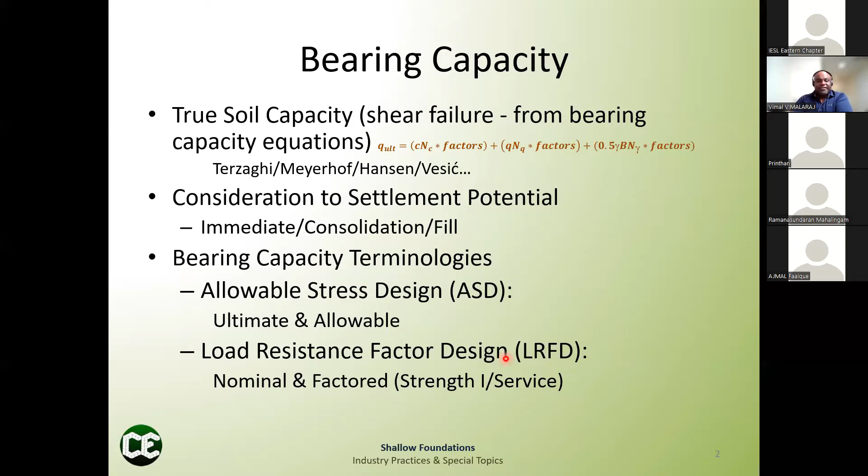So the next one, I want to talk about the true soil capacity. That's totally a 3-term equation. You have a first component, second component, and third component. You have a lot of factors here, except this, the basic component.

So the first one is soil cohesion related. If the soil has a cohesion, say for example if it's a clay soil or something like that, if it has some cohesion, you can consider those values.

And the second component is effective stress at the footing depth. So whatever depth you are placing the footing, that second term is dependent on that. The third term is half the footing width below the bottom of the footing. If you place the footing deep enough, then you can provide a higher bearing capacity, because this term is going to depend on that value.

That's why even if you have a big 30-story structure, if you want to put like a 2-3 level parking garage below, then you are going to put your foundation way deeper than the finished grade. Then you're going to have a pretty large soil bearing capacity, but then you need to consider the settlement.

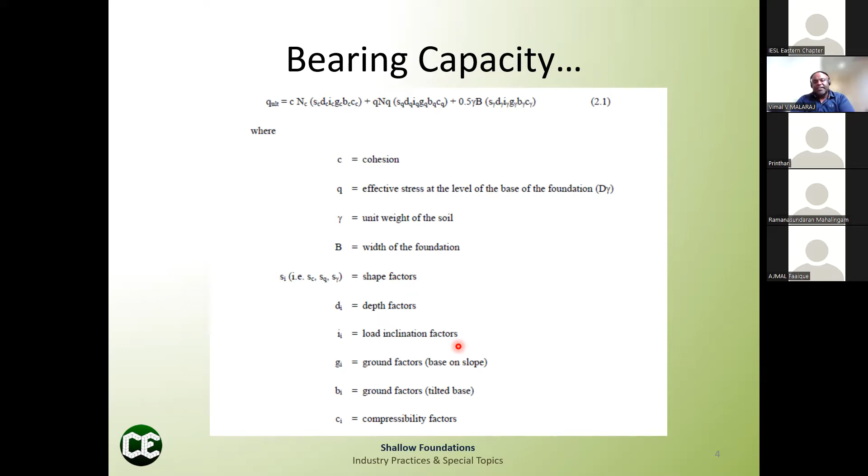So these are the bearing capacity factors: NC, NQ, and N gamma. This is Terzaghi, who first introduced the concept of bearing capacity. He's the father of geotech.

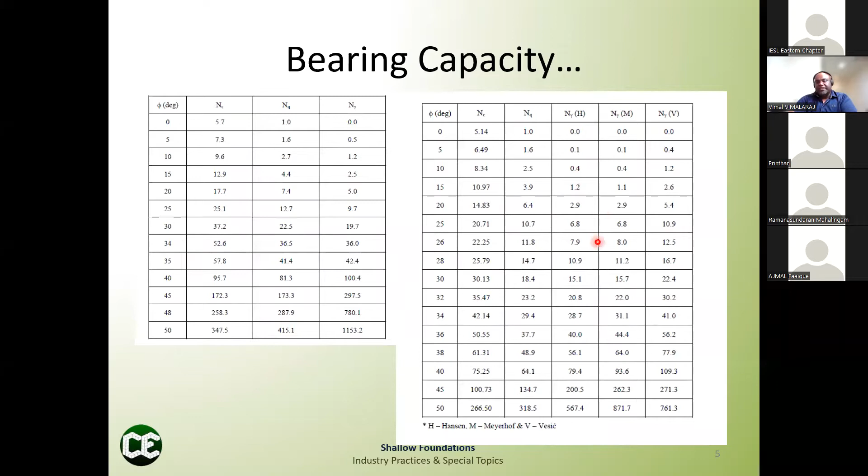Then everybody modified it—Hansen, Meyerhof—basically introduced different factors and calculated these values. Everything is a little different. NC and NQ are the same, but N gamma is different for all these authors.

So bearing capacity failure is a shear failure in the soils, and there are three cases of how the footing can fail. It could be a general shear failure, which is the most common one—you're going to have a failure going fairly deep. That's why you use the half B term: if the footing is B in width, you go half B, because general failure is the most common type of failure.

Then you have local shear failure, and punching shear failure, meaning the footing just sinks into the soil. If the engineer or contractor is bad, you'll have loose or soft soils at the base of the foundation causing this kind of punching failure, but it's very rare because with proper construction control, compaction, and soil preparation, punching failure is very rare.

So local shear failure is in between, but the most common case is general shear failure. If you consider punching shear failure, there are factors you need to apply to calculate the actual ultimate bearing capacity, because if there's a possibility of punching shear failure, you have to reduce your bearing capacity.

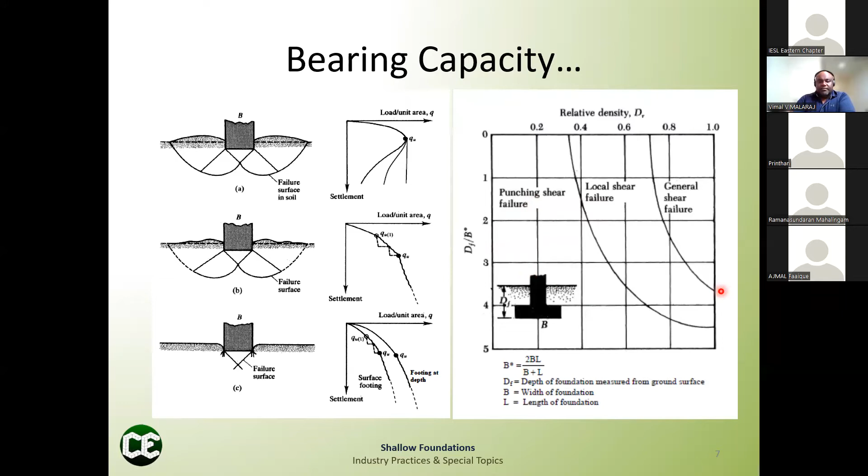So I have a spreadsheet developed for various methods. What I always do is, rather than considering just one method, I consider all these methods, because there'll be a huge variation.

If the groundwater table is shallower, the bearing capacity will go down. So I usually have a spreadsheet to calculate all these methods and get an average, then recommend a value. You also have to consider settlement, then go with the recommendation. This is for a particular footing size—let me go into it further.

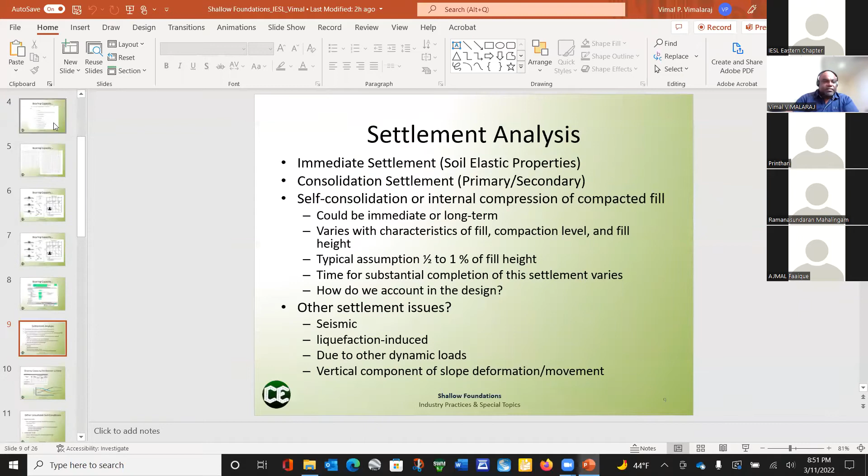Let me show the spreadsheet.

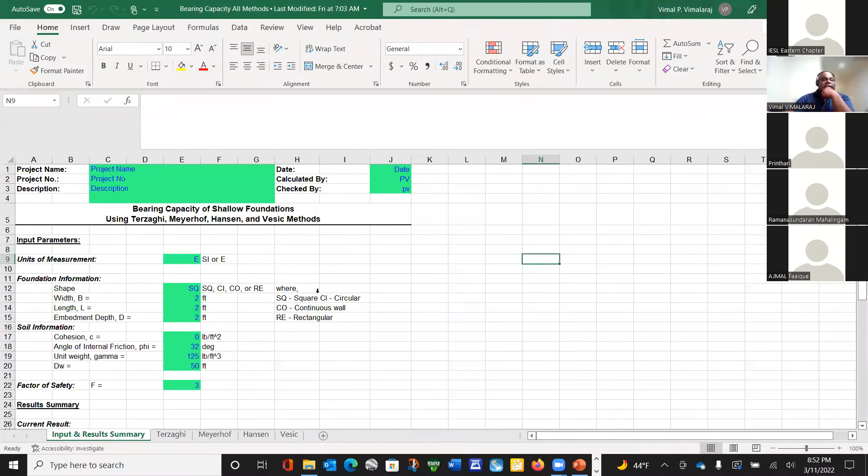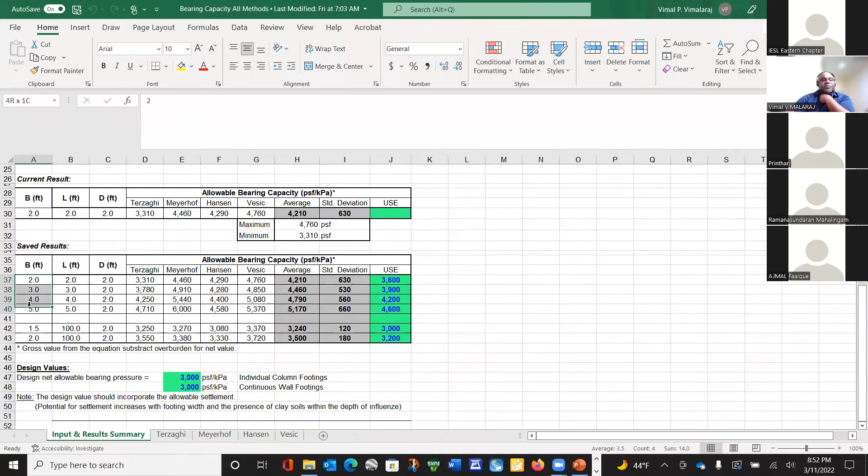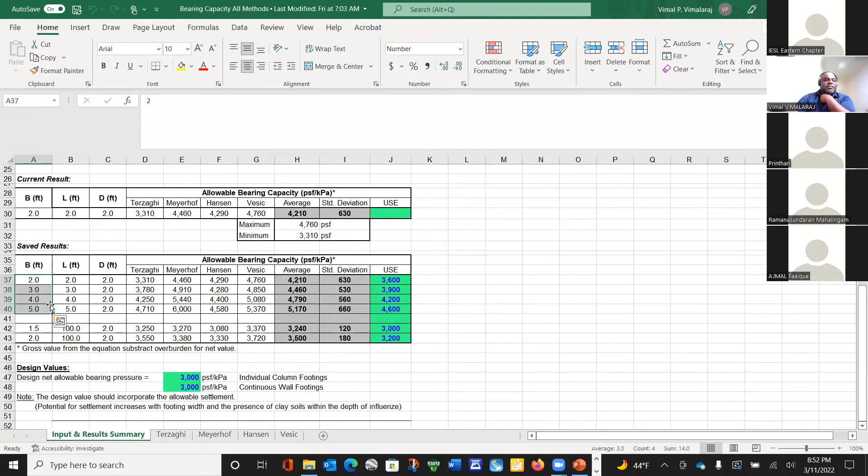So what I do is base it on true shear failure. If you have a building with various foundation sizes, I calculate for different widths. This is continuous—if you have a building on the edge, you might have a continuous wall foundation, and on the corners in some places you'll have column foundations. Then you calculate for different foundation widths and sizes, and recommend a net allowable bearing pressure.

But there's an important note: you need to consider settlement, because that might be the controlling factor in most cases. So you check it here, and when you calculate your settlement, you can recommend a particular value. Then this will be used by the structural engineer to design the foundation.

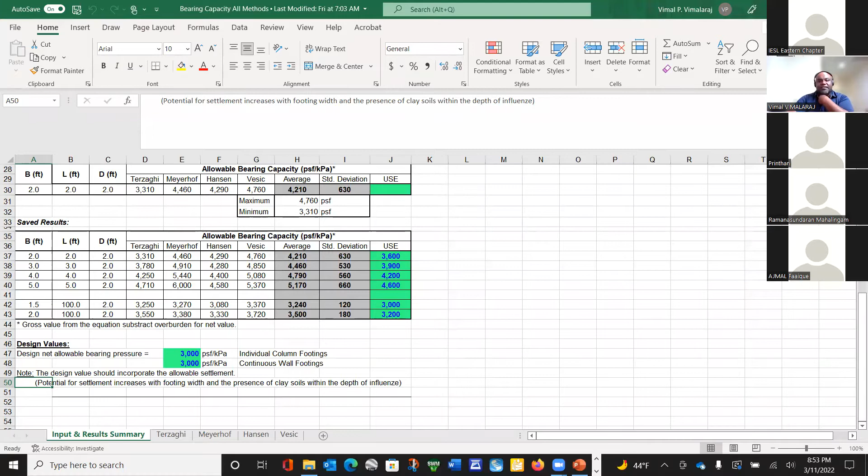And let's go to the... okay.

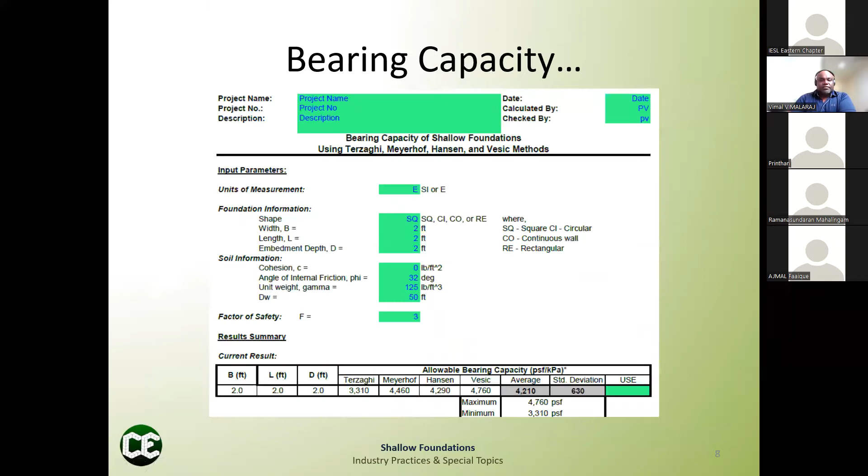When you go to settlement, when you apply the foundation load, you're going to have settlement. Depending on soil conditions, there could be immediate settlement. If you have clays with a shallow water table, you could have consolidation settlement—it could be primary, even secondary, even creep over a long time. It could happen. There's also one called self-consolidation or internal compression.

We usually don't learn much about this in university, but it's very important, because whenever you have a large site with a lot of cuts and fills—not all sites are flat. Some places are flat, but if you go onto a hillside, and you're going to place a 1,000 feet by 300 feet building, that's 300,000 square feet—that's a large building.

If you want to place it on flat ground, that's fine, but if the ground is sloping, there will be a lot of cuts and fills. So you'll cut one side, like 10-15 meters, and fill the other side 15 meters. That filling means you're placing compacted fill.

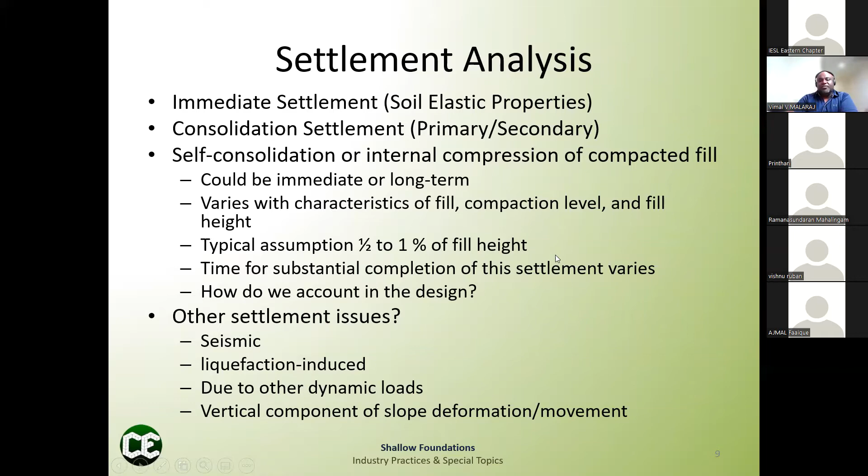And if you place the building right next to a slope, could there be any slope instability that adds settlement to the foundation? So those are things you need to look at overall. But if it's a large project with slopes and everything, everything needs to be carefully looked at before you prepare the geotech report.

So, bearing capacity settlement criteria - typically on a small project, I'll just give a particular value, like use 2000 PSF. If you take the IBC, International Building Code, they have minimum recommended values - usually for any soil you can use 1500 PSF. Even for bad soils, even the structural engineer without a geotech report could assume 1500 PSF.

And they have some kind of values you can use without a geotech report, but in our report, we will recommend whatever we calculate. So we don't have to depend on the building code or anything.

That's why on all these projects they need a geotech report, so they can economically size the foundation and address any soil issues. There are sites with soil problems, so they want to find out those things. That's why here in this area in the US, a geotech report is important.

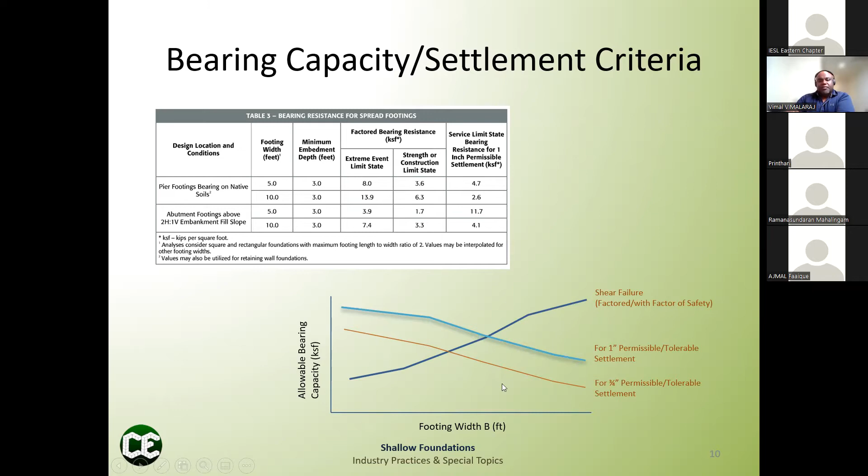There's a certain point where it might make sense to design the foundation, but you need to pick, say if your footing width is 1 meter, the structural engineer will go and pick this value - whichever is lowest, because you need to consider everything. If it's a 1 inch settlement, that's what you want to consider, so he considers this curve and this curve. If it's 1 meter, he goes there, and that's the value he has to use. If it doesn't work for the load, he'll pick another load, somewhere here. On large projects like bridges and very large buildings with significant structural loads, you'll develop a curve like this for a site, making it easier for the structural engineer to pick values depending on footing sizes.

So those are the typical bearing capacity theories, but there are some other unsuitable soil conditions. Here there's expansive soils, if it's clays.

If the clays are very dry in their native state, they can absorb water and expand. That's bad, because you calculate your settlement, but the expansion is a problem too. If the footing lifts up, then you're going to have problems with your house or building. So that's very important - we have to investigate expansive soils, if there's clay, and figure out how to address it.

The common procedure is you remove like 0.6 to 1 meter and replace it with good soils. Then you're not placing your foundation on the expansive clays, because whenever the clays are buried deeper, there's much less chance for water to get into them and cause expansion - at least that's the theory. You could also do some alternate designs.

For houses, they will design a post-tension slab foundation that can tolerate some expansive movement in the clays. For large buildings, it's hard to do a post-tension slab because of the spans and everything. But there, they can do drilled piers with a bell bottom - you put a drill shaft, and if you have a bell bottom, meaning it goes down a little wider this way, then it's hard to pull it out. There are some places here in this area, whenever I do geotech reports for some projects, I had to be really careful because I know there are very, very bad expansive clays, and I had to investigate everything and do the right testing to provide the correct recommendation.

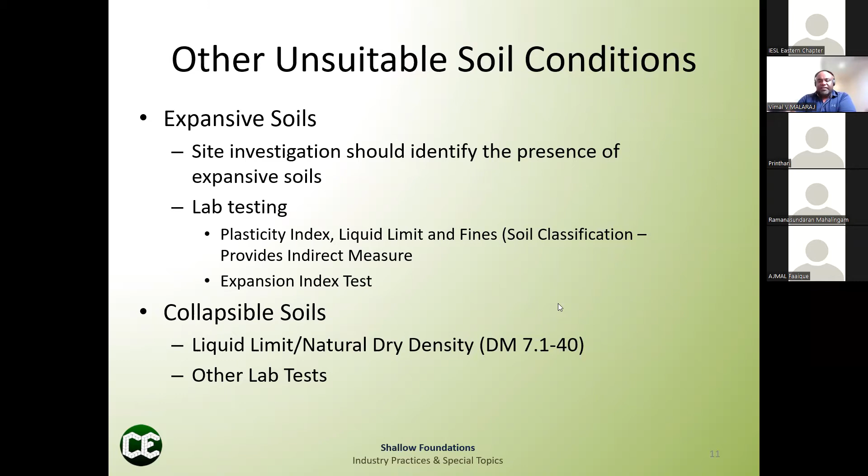In Sri Lanka there may be, but in some regions here also there are collapsible soils, because they are very strong when dry, but whenever they get some moisture, they can just collapse and cause a lot of settlement. There are certain criteria you can use to identify collapsible soils, for example here.

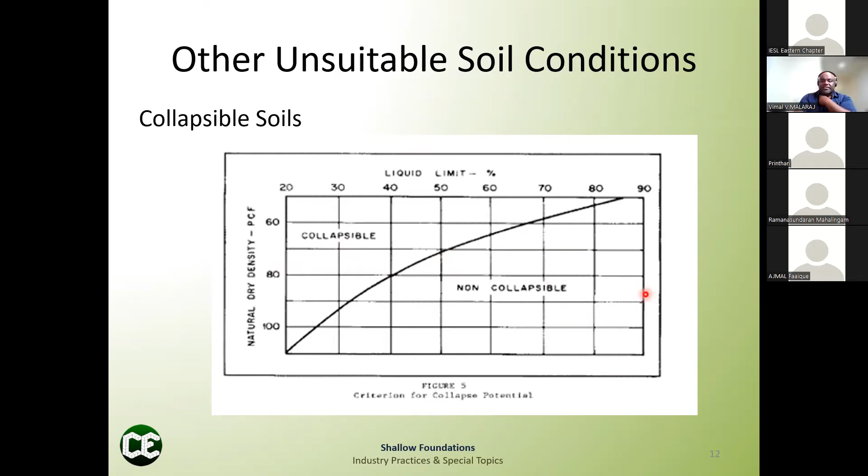Whenever you want to recommend bearing capacity, everything in the geotech report, you need soil information. You cannot just assume, okay, this is the site at this address, so let's use a 30-degree angle and give all the bearing capacity and everything. Then you will end up in the middle of a lawsuit. It's usually like that here, so you have to be careful. You need the soil information.

How much soil information do you need? If it's a small house, you will dig down like 5 to 10 feet. That's enough, because usually we try to go 2 times the width of the footing. So if it's 3 feet, 6 feet should be enough. If you know the soil information to 6 feet, you can provide the recommendations, all the bearing capacity and everything. But if it's a bridge foundation, you're going to have larger loads and bigger footings.

Then you may have to drill borings to 100 feet. If it's a bridge and everything, there are government AASHTO guidelines you need to follow, typically 100-foot borings and everything. Also, even a small building, if it's in a problem area, let's say liquefiable soils because of earthquakes, then you need to do the right exploration, borings or test pits, and the right field testing to get your soil information.

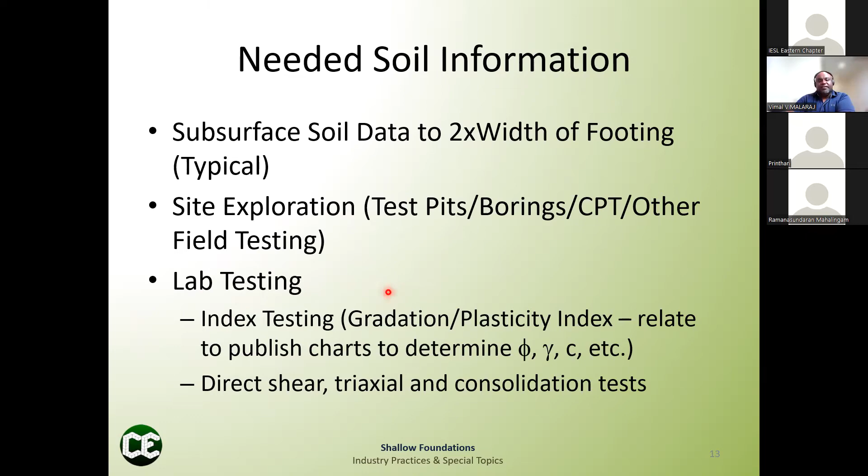If it's a large enough project, yeah, we can include a direct shear and everything. But if the project is small enough, you have the budget also small enough. You don't have an unlimited budget on the geotech, you have a particular budget. You give the proposal, and within that proposal, because it's competitive, like if I give for a small house, and if I want to do the geotech report, and if I say $10,000, then somebody else is going to get the project. So that's why you need to know the soil condition, then you can include the right amount of testing, and you can limit the budget and get the project.

So this is test pits, and it's one of my projects. We use the backhoe or excavator, depending on if it's hard soils, and if I want to dig down like 20 feet, 25 feet, I will use a large excavator.

This is a trench. I don't want to get into some earthquake faults, because this project had some earthquake faults. There are regulations, you cannot put the building on the fault. So you need to identify the faults, that's not my expertise. I had another geologist, he did the earthquake fault trenches, so they can identify the faults if there are some. Then once they investigate, I will also log the soils and what kind of soils and everything, collect samples, and prepare the logs.

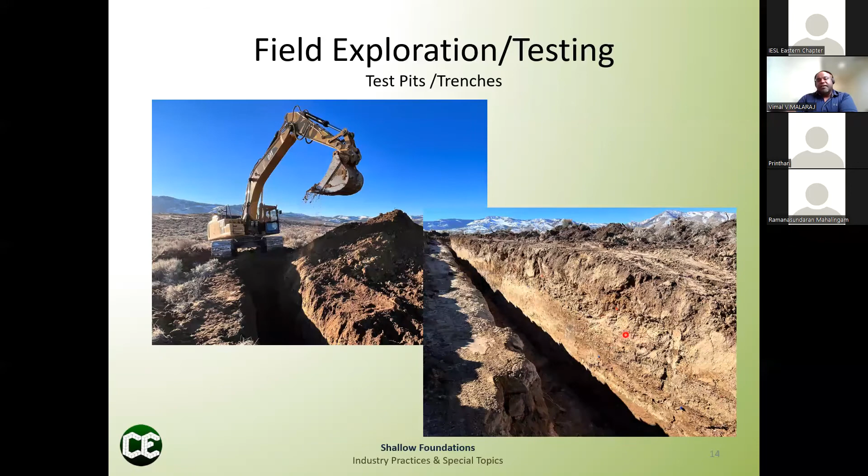Okay, so this is borings. We don't do cone penetrometer testing, it's pretty hard in this area, the soil has a lot of gravels. Typically if you have clays and everything, CPT is you push a cone, then depending on your result, you can figure out what kind of soils and what kind of properties it has. But here it's hard to push those, because we have a lot of gravels and cobbles, and it's hard to do everywhere. So we typically do the borings.

It could be just a standard hollow stem auger boring with the SPT testing, standard penetration testing. SPT testing is a measure, you drive the sampler 6 inches, 6 inches, 6 inches, 0.15 meter intervals, then for the last 0.3 meters, whatever the block counts, that's called the SPT blow count, field blow count. Then you can adjust it and convert it. There are charts in the geotech literature, you use those block counts, average block counts, then you can calculate the friction angle and do the settlement calculations based on those block counts. It's very helpful, the SPT block count.

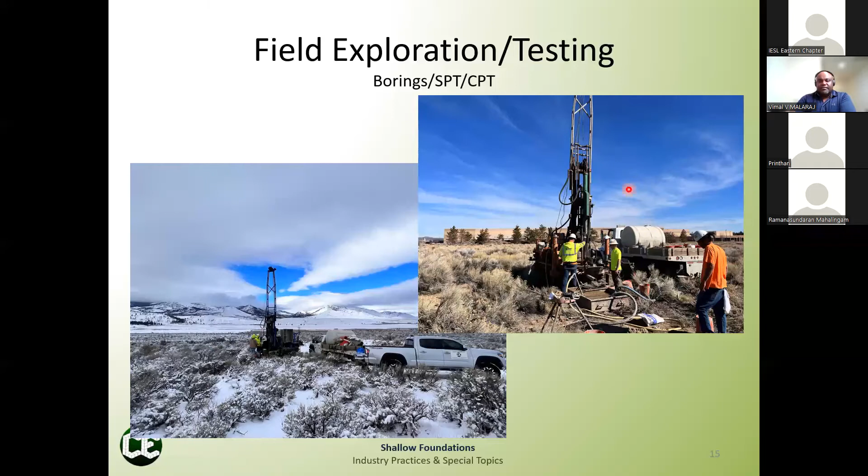And other testing means, let's see. Okay, so this is like a standard boring log, you do the SPT blows in the last 12 inches, that's your SPT field blow count, it will tell you the soil. This was one of my projects, so you log them, this sample will come out as silty sand with gravel. Then we can log the fines and sand, gravel, how much percentage and everything. Then I'll do lab testing right here, the lab test results will exactly tell me what is your liquid limit and plastic limit. Then I can confirm my field logs, and prepare this boring log or test pit log.

Then you have all the information throughout the site, and you use that information to develop recommendations. It's not only the main recommendation for your foundation for a building, there are so many other recommendations you have to do.

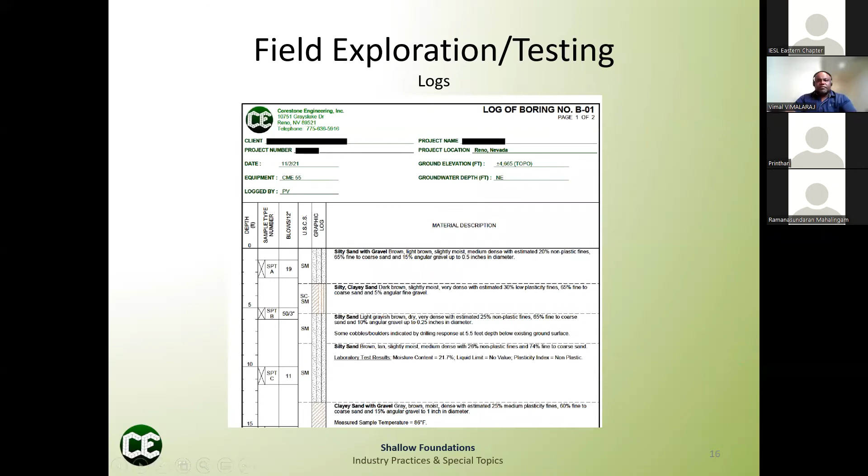So another testing is geophysical testing, you can measure the shear velocity with the geophysical testing. You have this geophone sensors and a data unit, so it will collect your data, and you can model the shear velocity. This is useful whenever you do the seismic classification and stuff.

And then you can do the geophysical testing to find out your P wave velocity, because if there's a bedrock site, they want to know whether they can excavate the bedrock. If it is soft enough, you can use the dozer and rippers and everything, they can excavate it. Otherwise if it is very hard, you need blasting. So if I need that information, I'll do bedrock coring, and do this kind of geophysical testing, then you can correlate to charts and everything, and figure out whether you need blasting or you can excavate.

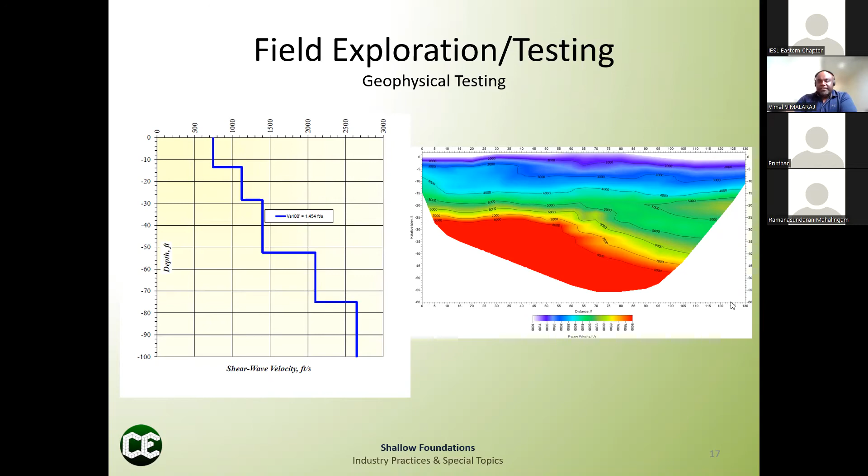Okay, so I just want to cover the geotechnical investigation report.

I'm not sure how frequent in Sri Lanka they do geotech reports for projects, but here, for single family houses, like small houses, you don't need it, except some regions, some cities and counties might require it to build a house. But if it's a commercial project, even a small coffee shop, typically you need a geotech report. Different cities and states have regulations requiring a geotech report for these kinds of projects.

But even if you want to build a house, the city will tell you that you don't need a geotech report, but when you build the foundation, somebody needs to certify the soils. So they'll call us, and we'll have to go take a look at it, and whatever design they use, the bearing capacity - are the soils good enough? Do you have expansive soils? Those are things we evaluate at that time during construction for small projects.

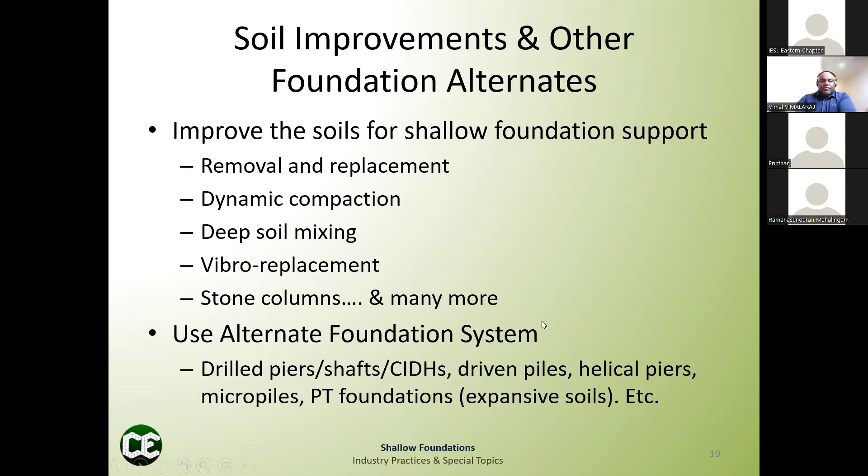Okay, I want to touch on this. This is something special, a special topic. I already went through shallow foundations and what we can do if they don't work, improve the soils or do deep foundations. So I want to touch base on a special topic, especially dynamic foundation analysis, because I come across it a lot, since we do a lot of geothermal power plant projects.

Geothermal power plants mean you have production wells, because you get geothermal energy from the ground. They drill like 1,000 feet or something to get a bigger heated source of water, then use that water to produce electricity. Then they inject it back in the injection drill hole. So the energy comes from that heated steam or water, and they use that energy to produce electricity.

Once you get your energy from the ground as steam, you pass it through the turbine generator. The turbine works and the generator produces electricity. You may have two turbines with the generator in the middle, but these are huge pieces of equipment, they are rotating equipment.

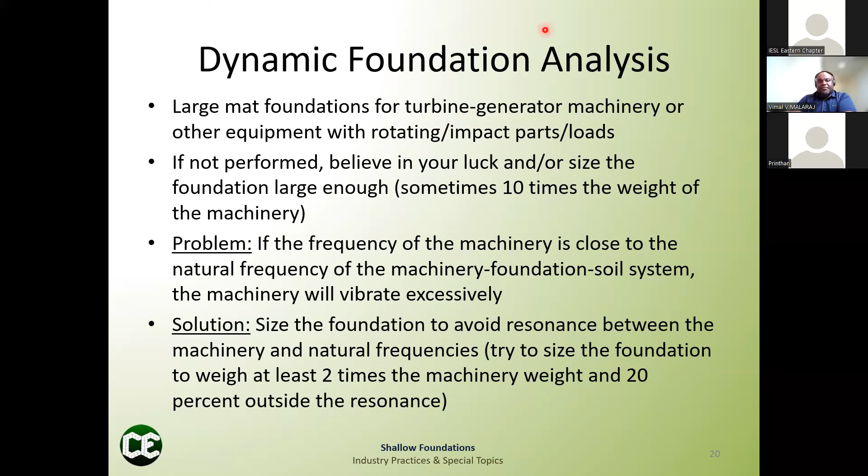So you have to look at it as a machinery frequency. If you have an RPM, you can calculate your machinery frequency - that's very straightforward. Then the natural frequency of the system, as I told you, is the equipment, foundation, soil together.

So it will change - you have vertical mode, horizontal, rotation, torsional. So you're going to have various natural frequencies, different for each vertical mode, one natural frequency. So everything shouldn't match, all these cases shouldn't match.

Whatever you calculate, it shouldn't match - you should be 20% away. So that's pretty tough, you need to make sure everything works.

So how do you calculate your natural frequency? If you have the stiffness, you can calculate your natural frequency, because you have K over M, and M is the total mass - mass of the foundation plus the machinery system.

That's the one sitting on the soils. And then your K is the stiffness value, which depends on your soil properties, spring stiffness value. So soil properties, typically you need the shear modulus, Poisson ratio, weight, and everything.

Since it's so complicated, we try to do it in two methods. There are two methods - it's called the lumped parameter method and the elastic half space method.

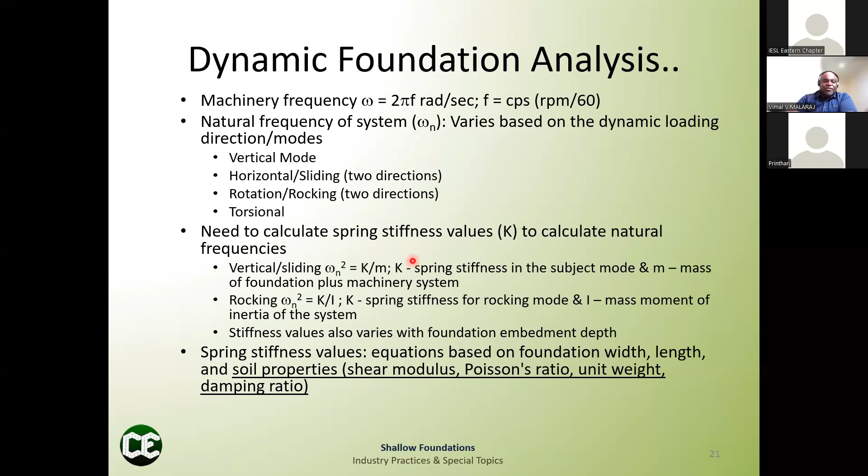Just to make sure, because it's a complicated analysis, you want to make sure it works. So you do it in two ways, and then you can make sure the foundation size is right, because you have a particular size.

You need a particular size, say 15 by 40 feet - that's the size needed to place the equipment. Sometimes you may have to increase the size, you may have to increase the thickness, just to make the frequency work.

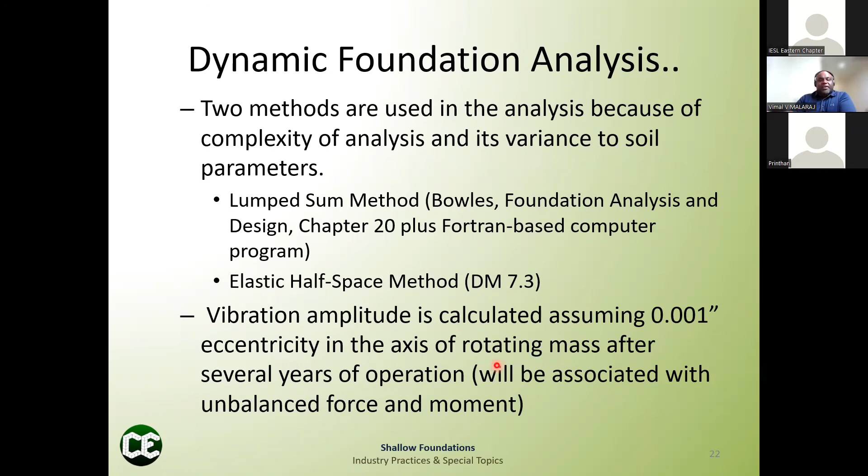So we try to show how this vibration amplitude happens - it wouldn't be perfect, the equipment. If you have some kind of eccentricity, then only you will have a vibration issue.

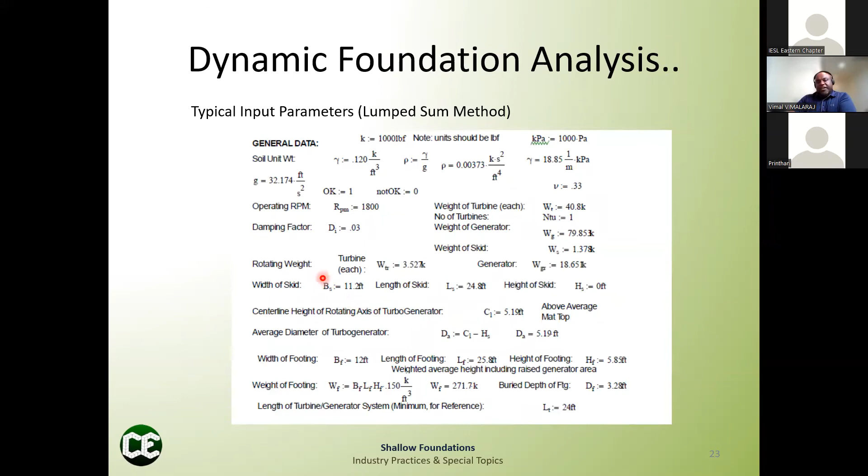And these things, the equipment load, they will provide. Then we usually try to size the foundation 2 to 3 times the equipment weight - that's the kind of optimized approach.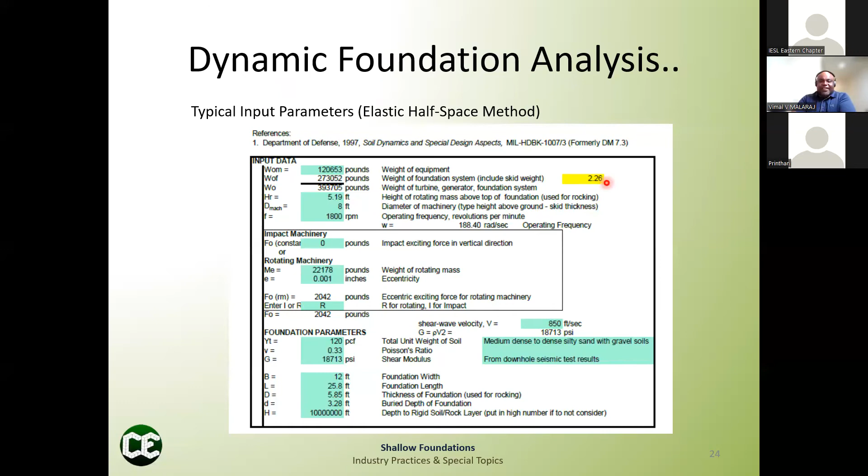I don't want to go below 2 because you want to optimize. It's a general rule of thumb - you just need at least 2, and you try to optimize the size, because concrete costs a lot of money, especially for geothermal power plants which are built somewhere remote. You don't have a concrete mix plant nearby, so you have to truck the concrete far away and do special things - it costs a lot. So when building a geothermal power plant, this analysis is very important. You don't want to put like 10 times the size - if you size it at 2 to 2.26 times the weight of the equipment, that's a lot of savings. But at the same time, you want to make sure it doesn't have a vibration problem when operating.

So this is the results - they will give me the foundation, the minimum foundation size, then I will recommend the foundation width and length. This is for a project in Guatemala. Actually, I did some work where a local firm did the geotech investigation but couldn't do the dynamic foundation analysis, so this company came back and wanted me to do that.

If you see these values, you calculate your frequency ratio. So 1.58 means you are 58% away from the resonance - that's what it means. In one method I'm getting almost 20% away from the resonance, so I just want to make sure it's more than 1.2 or less than 0.8 for this frequency ratio.

Sometimes they will have 2 generators - an original generator and a spare generator. They want to make it work for both generators, so you have to do the analysis twice to make sure everything is right for both, because the weight changes. The rotational speed is the same, but the weight of the generator will change, and then everything changes - the frequency.

So they have 2 generators - you have a turbine and generator, and I had to size this. I had to make sure this foundation width, length and everything together works for the turbine plus the original generator and the spare generator. It's the same foundation - the foundation is not going to change, but whatever you calculate should work for everything. It's just one foundation. It's a fairly small turbine generator, but I have designed a pretty large foundation too. They will put the turbine and the generator in the middle.

The turbine will be connected because it's one shaft - the turbine is the one getting the steam, so it rotates and it rotates the generator, which creates electricity.

Question: is there a way we can introduce a damper so we can optimize the foundation design? Dampers - yeah, you can dampen and change the stiffness value, but those things cost too. You'd rather size the foundation right and put it on the ground because it's less costly than damping. Everything is bolted - you have a structural frame bolted into the foundation, and the equipment is supported on the foundation, so everything acts as one system. Your equipment, turbine generator, and the foundation - the foundation is buried, above ground about 1 foot, like 0.3 meters, but everything else is buried, and everything as a system creates a natural frequency. If you introduce damping between the equipment and the foundation, it's going to change things.

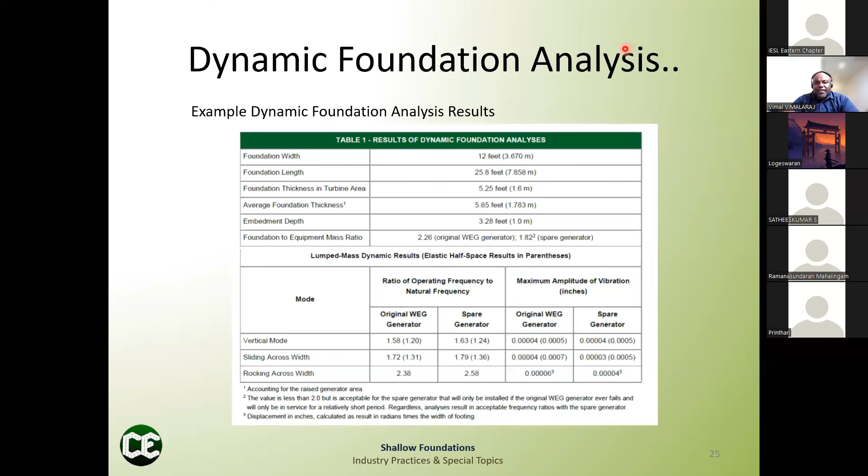Is there any equation for the depth for shallow foundation? I saw that width is there - that one equation you mentioned in the previous slides. Let's see, we'll go to the slides. This one? No, the depth is there. No, I'm not asking for bearing capacity, I'm asking for the depth of the shallow foundation normally.

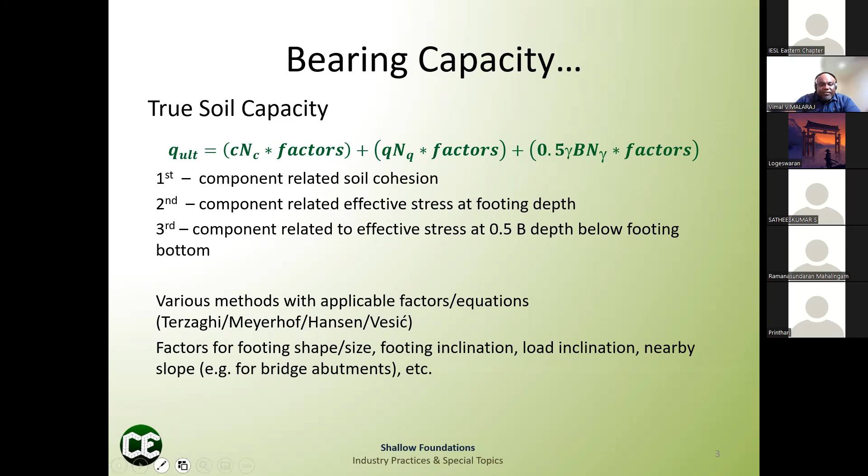Okay, let's see - soil report, yes, I think it's probably under the geotech report. Minimum foundation depth of frost, is that right? Is there any equation for that?

Usually we don't have a frost problem here, even though my area gets a lot of snow in winter. I didn't even go into that, because usually your depth of foundation is going to be based on sliding - if you want passive resistance protection, typically 2 feet is a good depth, 0.6 meters, because you don't want to undermine the foundation.

If you don't have frost issue, that's the main thing you want to consider. Typically, even without frost issue, we recommend like a 2 feet foundation depth, because if you undermine the foundation, if the soils are removed and everything, it's a problem. So it's better to have the exterior foundation for the building sufficiently deep.

In Sri Lanka, you'll have the wind load, so then you have a lateral issue too. So if you bury the foundation deep enough, you can depend on your passive soil pressure to resist some of the lateral load too, if you place it deep enough. Otherwise, typically 2 feet is a good value, 0.6 meters.

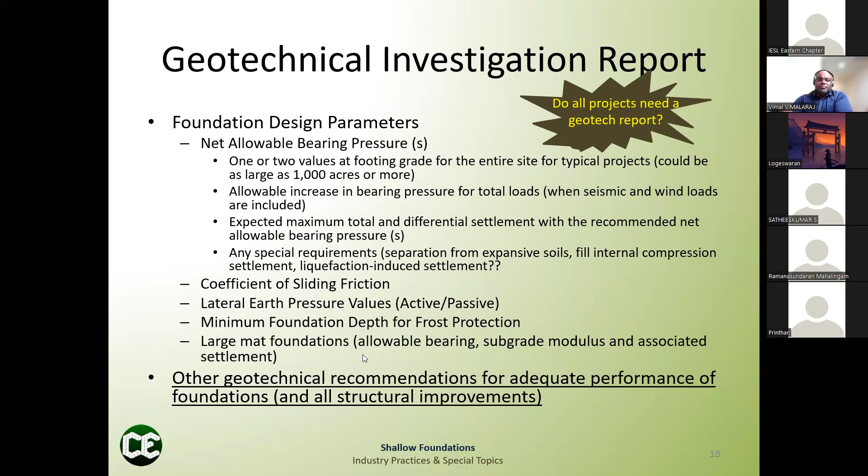Hello? Sorry, I'm getting the phone.